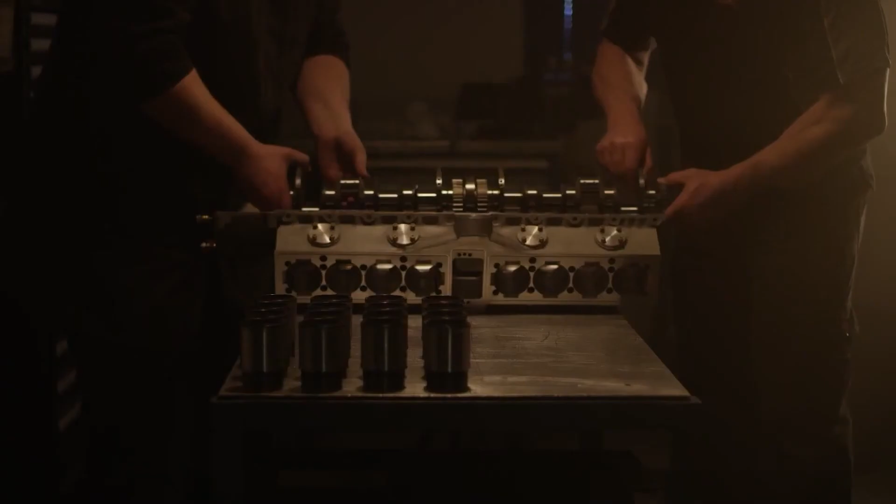Did you know there's an engine out there with no crankshaft? Or another so big it can host a wedding party? Welcome to the bizarre world of automotive engineering, where nothing is too strange if it works. Today we're counting down the 10 weirdest car engines you've never heard of, from V16 oddities to piston-free madness. Buckle up, because this ride gets mechanical in all the wrong ways.

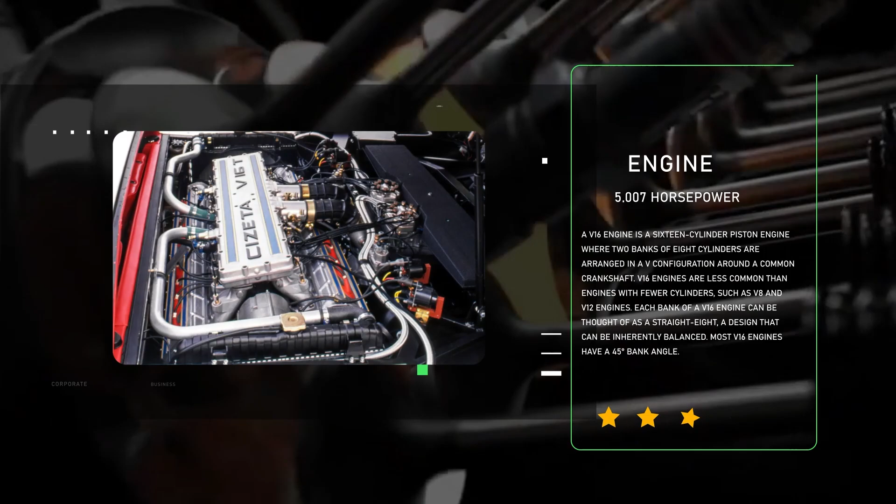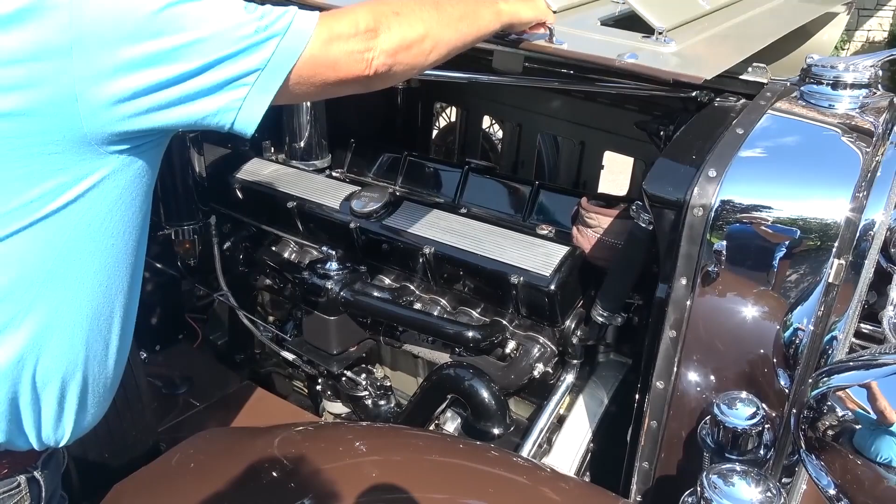Let's start off the list with an unusual build that nobody saw coming. Number 10, V16 Engine. The V16 engine is one of the weirdest ever made, not because it's impractical, but because it exists at all. 16 cylinders? Really? That's more moving parts than anyone asked for, and yet a few bold manufacturers decided to push the limits of engine design just to say, why not?

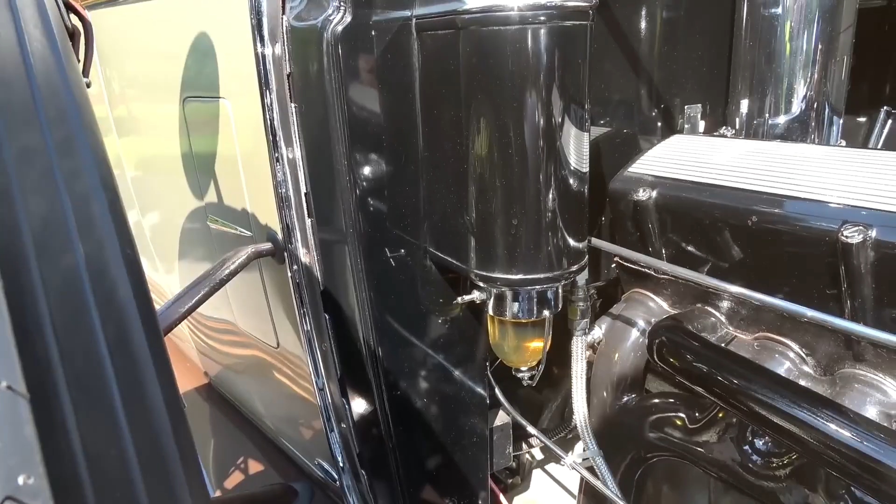While V8s became the gold standard for power and smoothness, a V16 takes that idea and doubles it, literally. You're looking at two V8s sharing a crankshaft, sometimes even operating in two separate banks with independent intake and exhaust systems. It's like someone saw a V12 and thought they could do more.

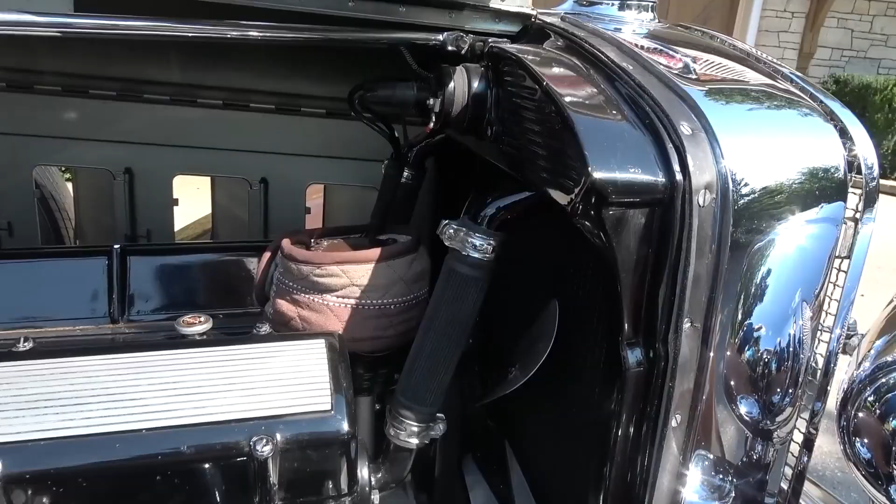Now, the weirdness really kicks in when you realize how few of these actually made it to public roads. Cadillac famously used V16s in the 1930s as rolling proof of engineering excess. Auto Union, which later became part of Audi, experimented with them for race cars. More recently, brands like Cizeta shoved a V16 into a transverse layout just to melt gearheads' brains.

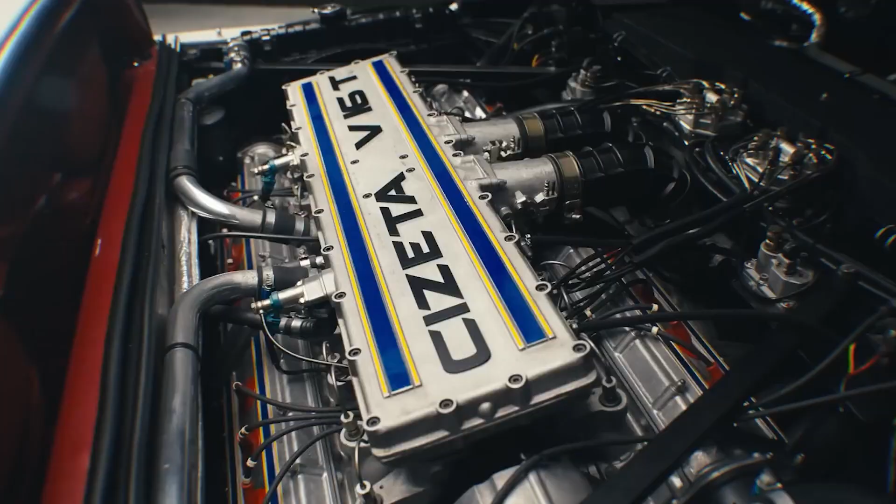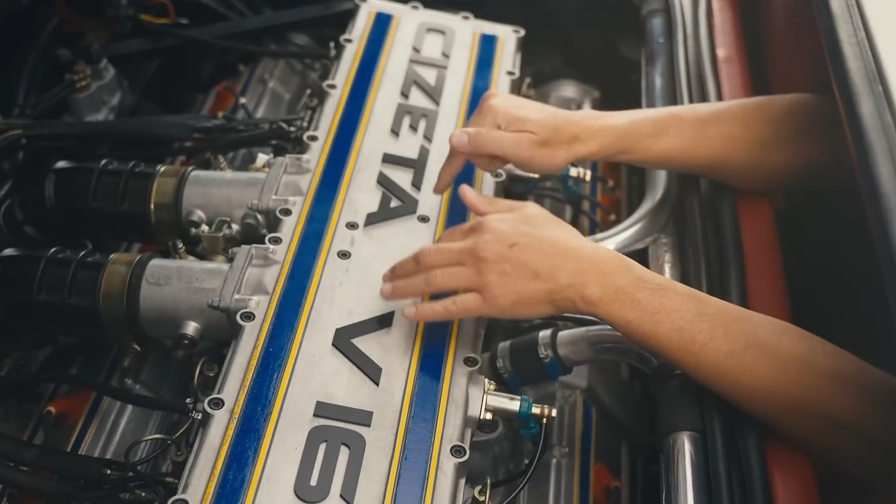The packaging issues alone are nightmare fuel. These engines are massive, complicated, and hard to cool, making them more of a flex than a functional solution. But perhaps the weirdest part is that they're too smooth. With so many cylinders firing in such close succession, a V16 barely makes a rumble. It hums. For some enthusiasts, that's oddly unsatisfying. You expect drama and get silence.

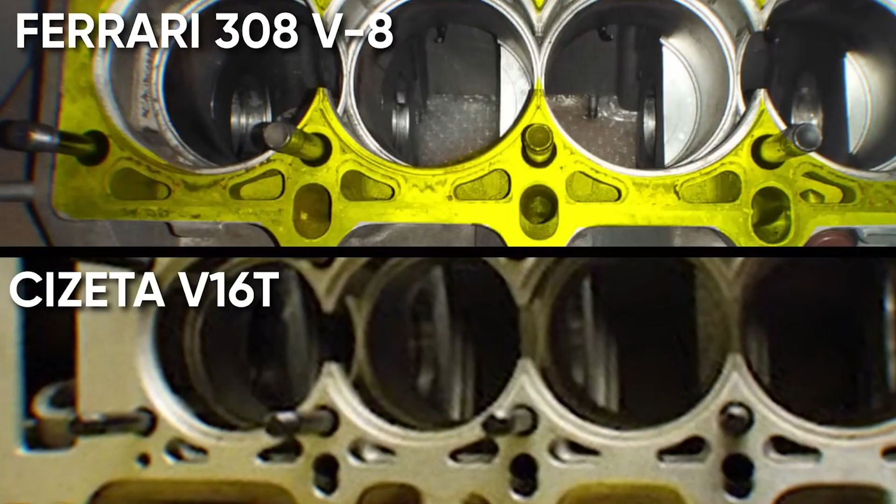So, while it's mechanically sound and mind-bogglingly balanced, the V16 ends up in the Weird Engine Hall of Fame not just because of its over-the-top layout, but because it answers a question almost nobody asked. It's a monument to excess, a curiosity of engineering bravado, and a glorious example of when more becomes bizarre just by existing.

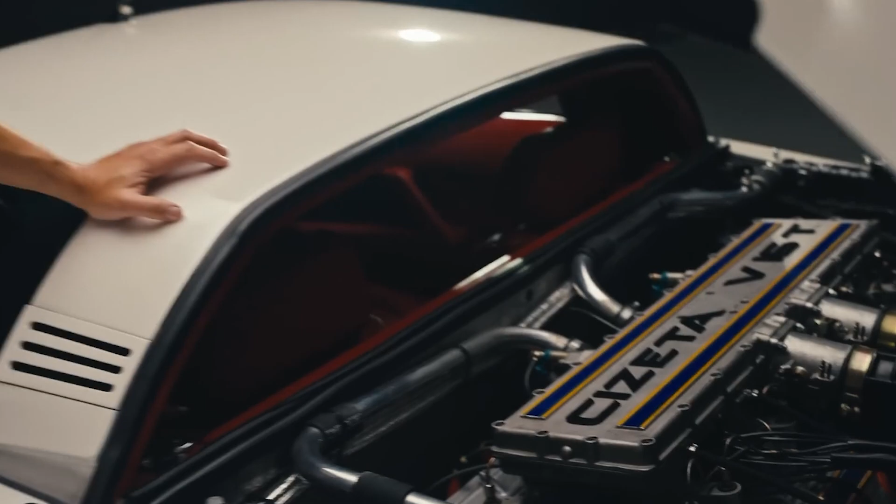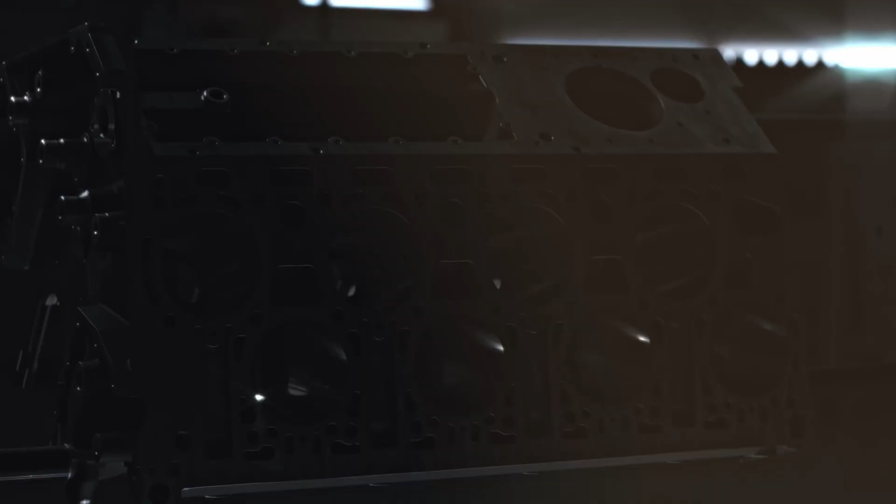Next on the list is this engineering oddity. Number 9, Bugatti W16. The Bugatti W16 is the mechanical absurdity that somehow made it into real-life hypercars. Think about it, a quad-turbocharged, 8-liter, 16-cylinder monster made by merging two narrow-angle V8s into a W configuration. That alone makes it one of the most over-engineered, overachieving power plants in automotive history. Who else but Bugatti would greenlight something this extreme just to make a point?

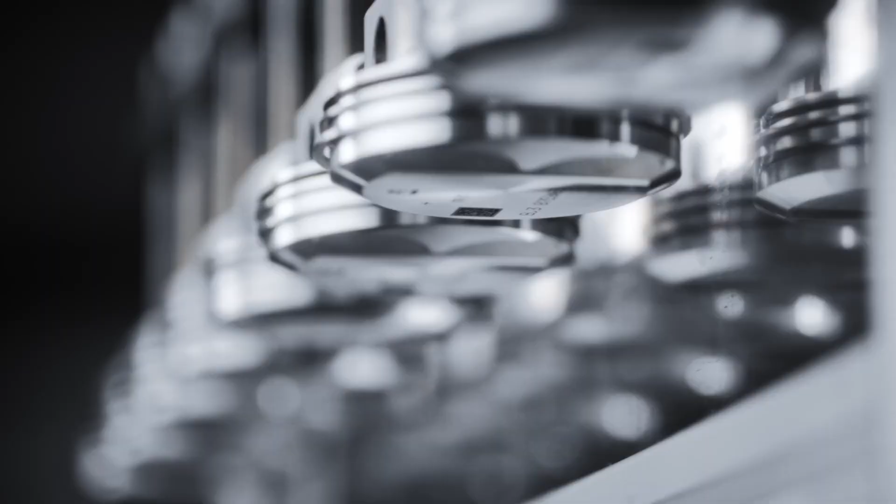Let's break down the weirdness. Most modern engines aim for efficiency, compact packaging, and manageable complexity. The W16 threw all that out the window. It has 64 valves, 4 turbochargers, 10 radiators, and demands an intricate cooling system just to stay civil at idle. The thing drinks fuel like a jet engine and sounds like one when pushed. Yet somehow this unholy amalgamation of parts puts out 1,000 to 1,600 horsepower, depending on the version.

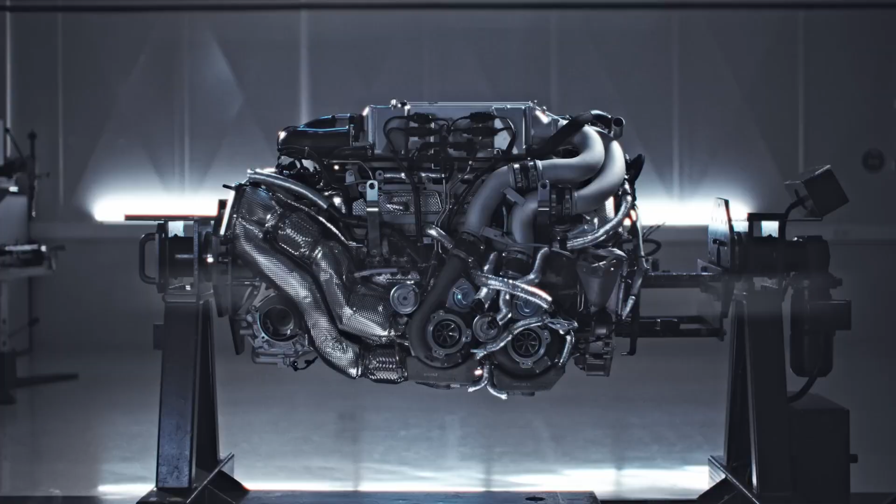This engine isn't a brute like you might expect. In fact, you can drive it in traffic. You can even make it your daily commute if you want your neighbors to know how edgy you are, and it won't overheat or stall. That's part of the weird genius. Bugatti didn't build a race engine. They built a luxury-capable monster that behaves better than some commuter cars.

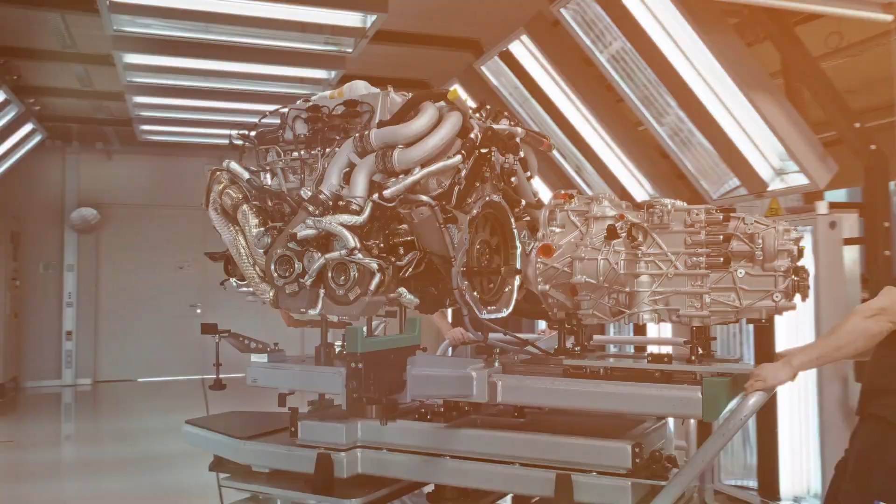Also, it's incredibly rare. Outside of the Veyron and Chiron, no other production car uses this setup. Why? Because no other car maker wants to mess with the sheer complexity or the astronomical cost of building something like this. It's not weird because it failed, it's weird because it succeeded. An engineering middle finger to normalcy, and we may never see anything quite like it again.

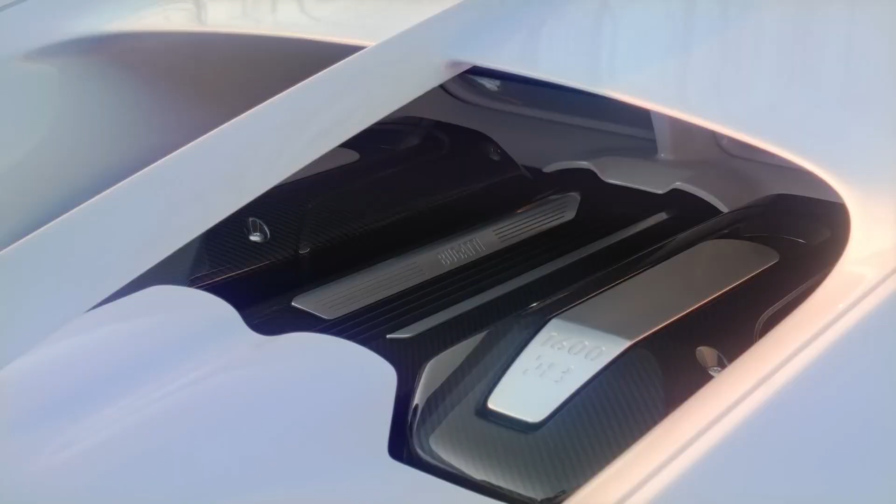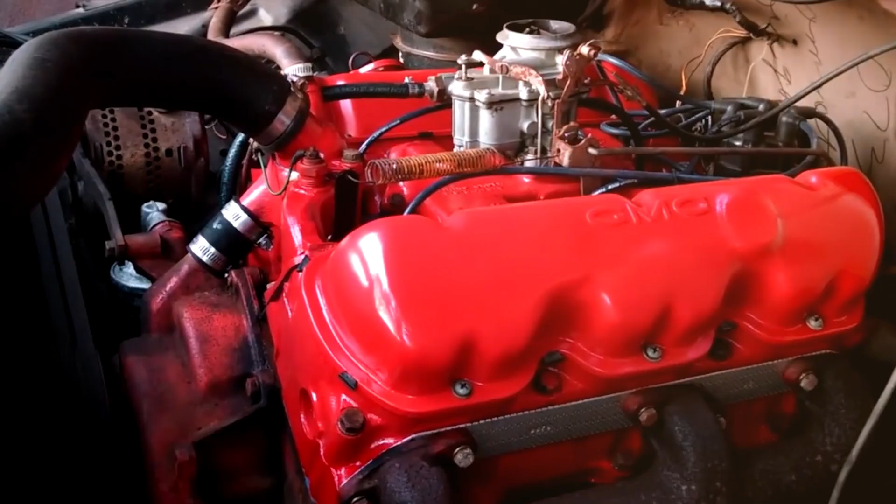Number 8, GMC Twin 6 V12. The GMC Twin 6 V12 is a bizarre mechanical mashup that somehow made it to production. Born in the 1960s, this 702 cubic inch, 11.5-liter behemoth wasn't made for speed demons or luxury cruisers. It was designed for workhorses like heavy-duty trucks.

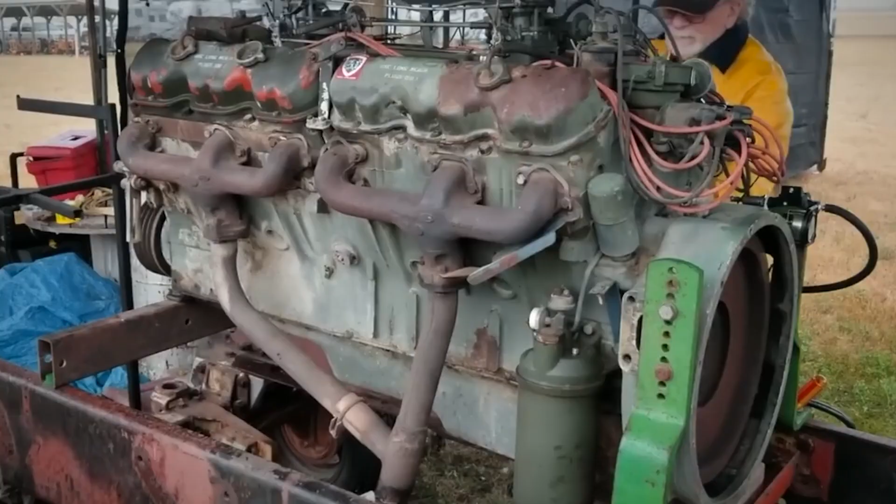Interestingly, GMC didn't build this V12 from scratch. Instead, they basically welded together two 351 cubic inch V6s. Yes, two V6s on a single block with a shared crankshaft. The result was a Frankenstein's monster of an engine that looked like it had no business running, but somehow did.

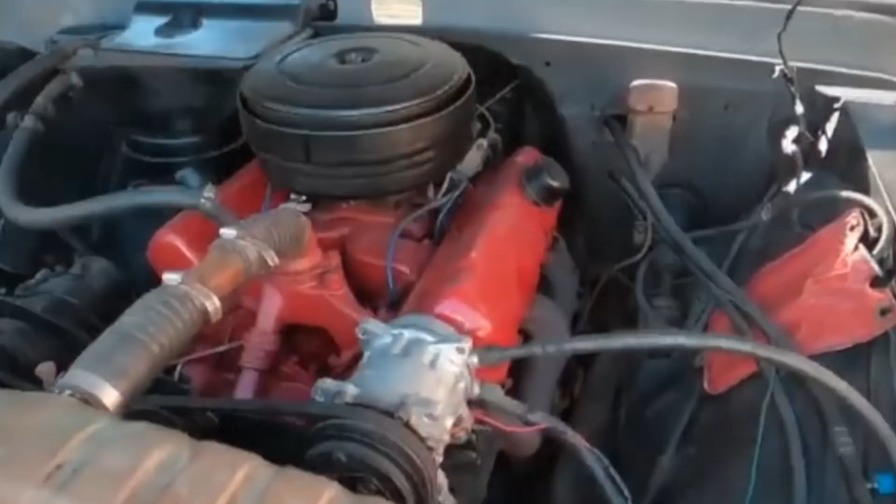It had a single distributor, but 2 intake manifolds, 2 exhaust manifolds, and 12 spark plugs. The engine produced a modest 275 horsepower, but a mountain-moving 630 pound-feet of torque. Perfect for hauling freight or dragging buildings off foundations.

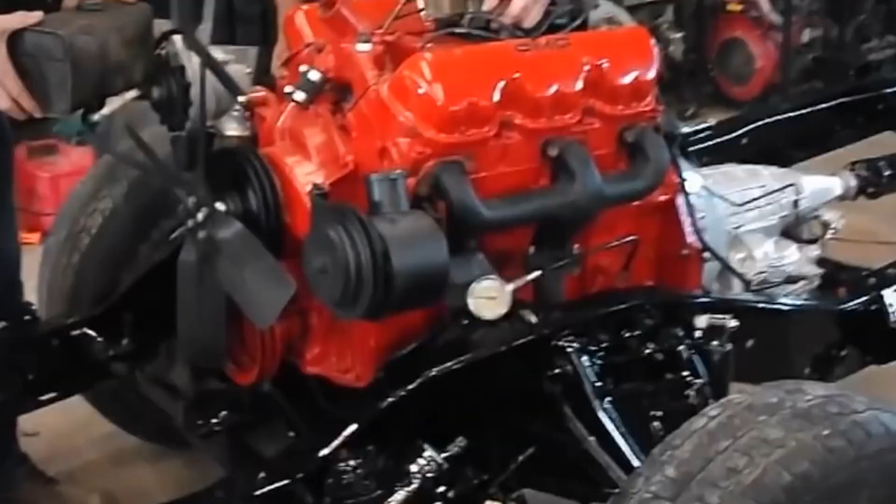What made it extra strange is how smooth it was for its size, as vibrations were almost non-existent, thanks to the symmetry of the design. But despite its clever layout and surprising refinement, it was massive, heavy, and drank fuel like a retired battleship.

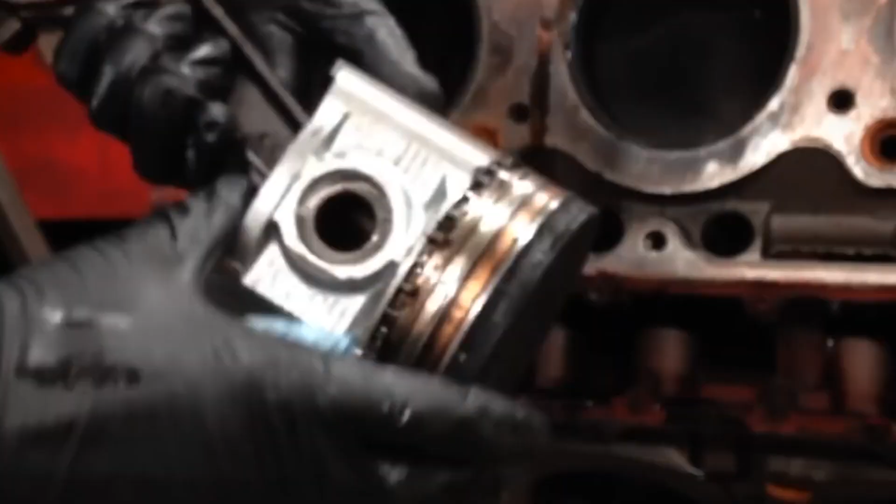Still, it ran cool, lasted forever, and made maintenance easy because many parts were shared with the V6s it was born from. Today, the Twin 6 is a forgotten oddity. It never made its way into pickups or performance builds, and you won't see one at your local drag strip. But its sheer size, hybridized design, and utilitarian purpose make it one of the weirdest engines ever bolted into a vehicle. It was practical insanity, a V12 born from necessity, not excess, and that, in the world of strange engines, earns its spot in the Hall of Fame.

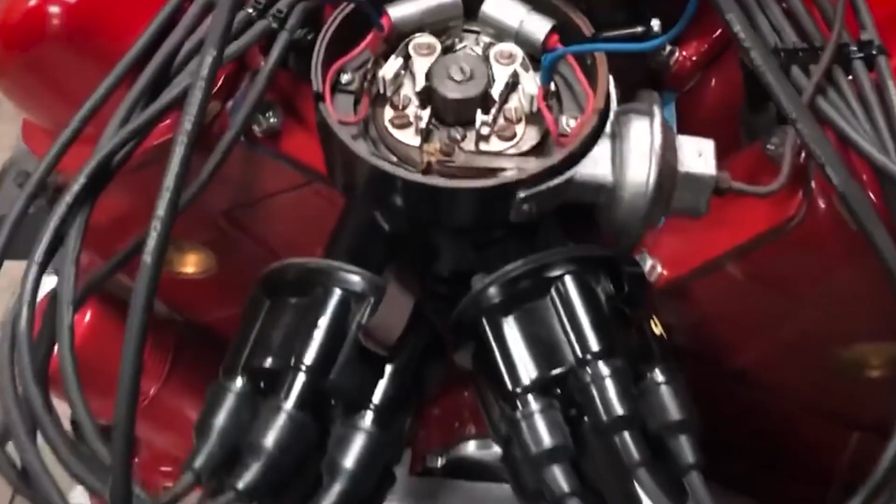Number 7, Oldsmobile Turbo Rocket V8. The Oldsmobile Turbo Rocket V8 earns its place among the weirdest engines ever made because it was a turbocharged V8 in the early 1960s. That alone should raise eyebrows.

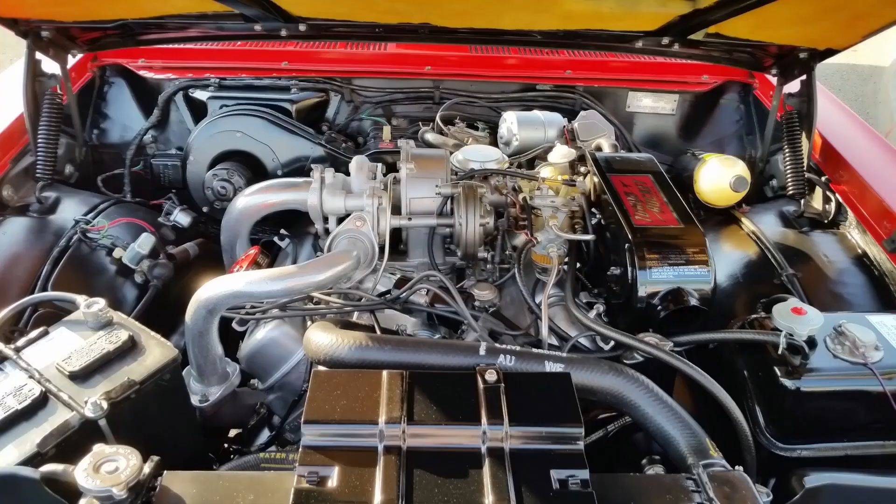Back in 1962, when most people still thought a turbo was some kind of airplane gadget, Oldsmobile dropped this oddity into the compact Jetfire Coupe. It was a 215 cubic inch, 3.5-liter aluminum V8 paired with a Garrett T5 turbocharger, making it one of the first production turbocharged engines in the world.

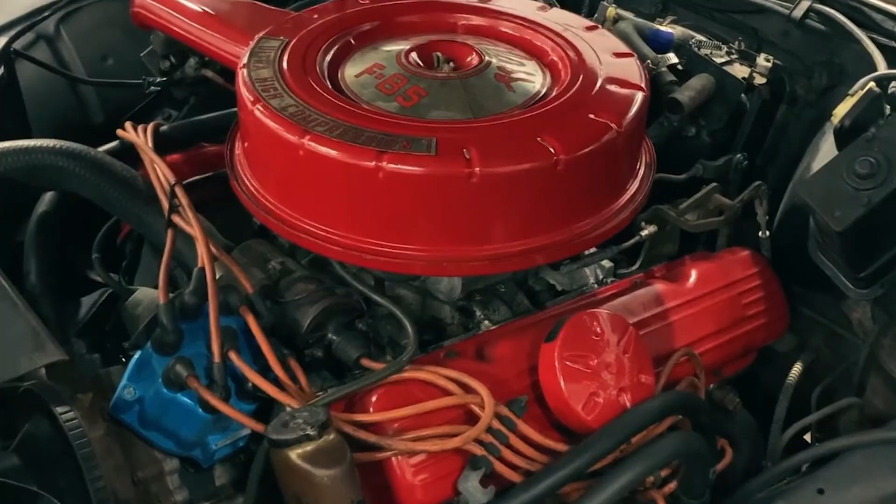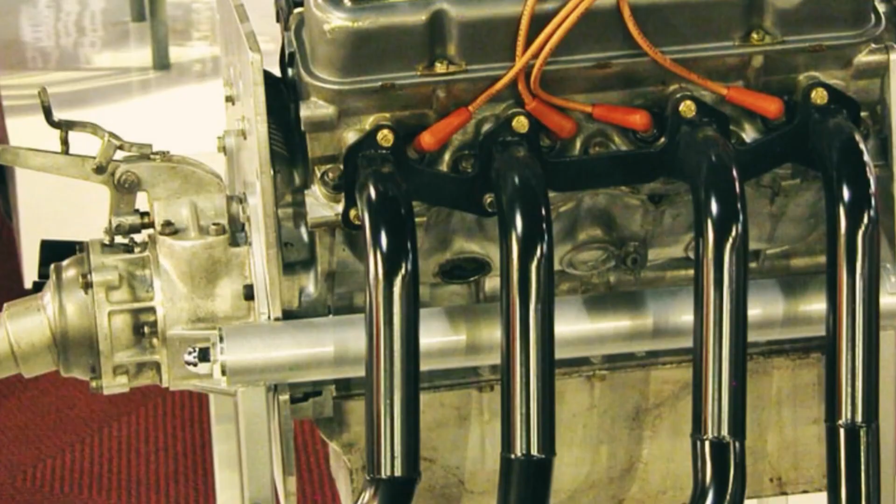But here's where things got truly bizarre. To keep the engine from detonating itself into scrap metal, Oldsmobile introduced a special fluid called turbo rocket fluid, a mix of water and methanol you had to refill manually. If the tank ran dry, performance dropped like a rock and the engine could knock or even break. It was like having to water your turbocharger to keep it happy. That's not engineering, that's a science experiment on wheels.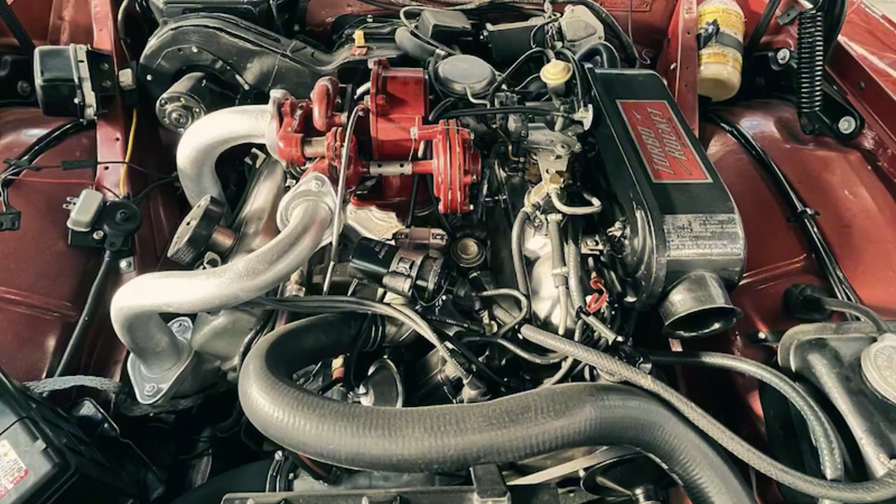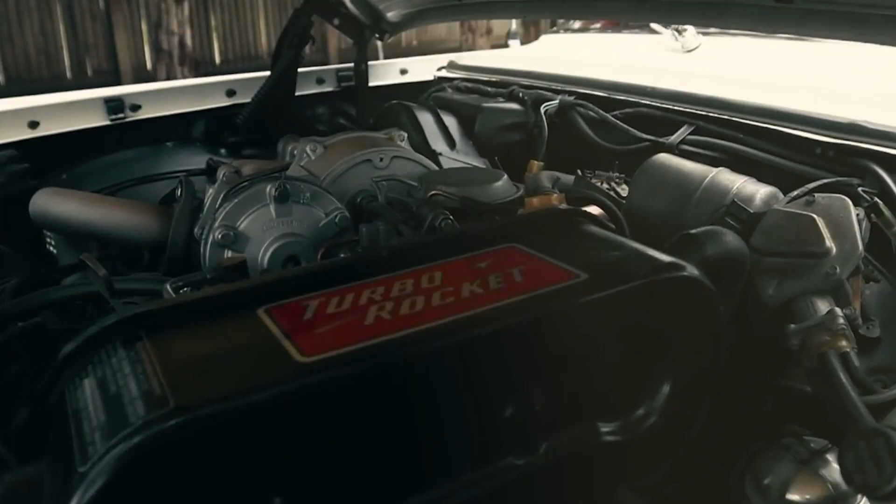Drivers didn't understand the tech, dealerships didn't know how to service it, and mechanics, most of them just yanked out the turbo altogether because it caused more confusion than horsepower. It made about 215 horsepower, which was impressive for its time, but the system's fragility and complexity doomed it. The Turbo Rocket V8 was way ahead of its time, but it was also way too complicated for an era

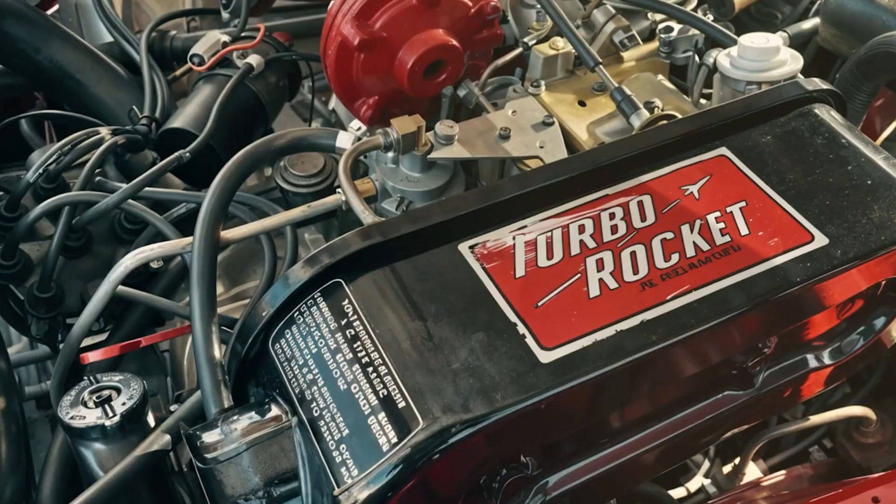where most people didn't even know what a fuel injection system was. It tried to introduce 21st century thinking in the middle of a muscle car decade, and the result was a magnificent, misunderstood mechanical weirdo that never stood a chance. That's why it's not just rare or historic, it's straight up bizarre, and still sparks conversation to this day.

Number 6, Cizeta V16T. The Cizeta V16T is one of the weirdest engines ever made because, frankly, no one asked for it, and yet someone still built it with absolute conviction. Designed in the late 80s by Claudio Zampolli, a former Lamborghini engineer, the V16T was powered by a 6-liter transverse-mounted V16 engine. Yes, you read that right, a 16-cylinder engine mounted sideways in a supercar.

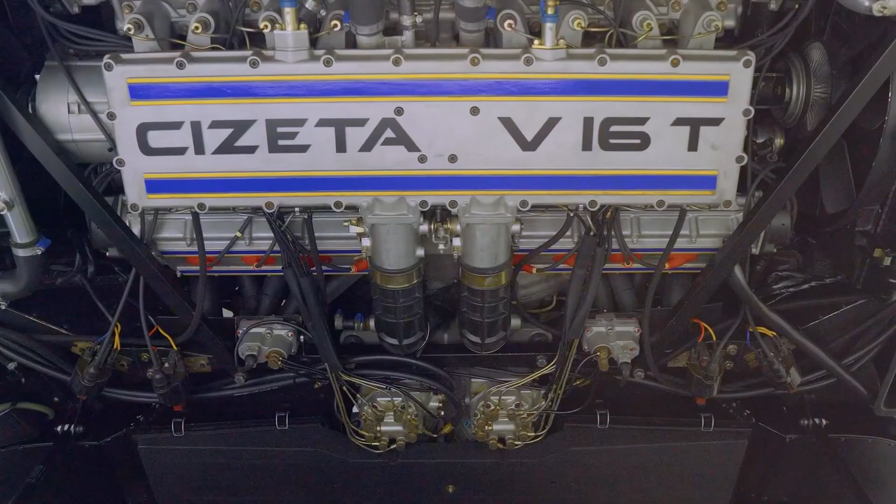In a world where V12s were already a handful and most supercars stuck to simpler V8s or V10s, this was like bringing a bazooka to a boxing match. What makes it even weirder is how they created it. The V16 was essentially 2 Lamborghini V8s fused together into a single block, with a central shaft routing power to a rear transaxle. That meant the engine was not only absurdly wide, but also required extensive engineering just to make the packaging work. This led to the car's massive, almost cartoonishly broad rear end.

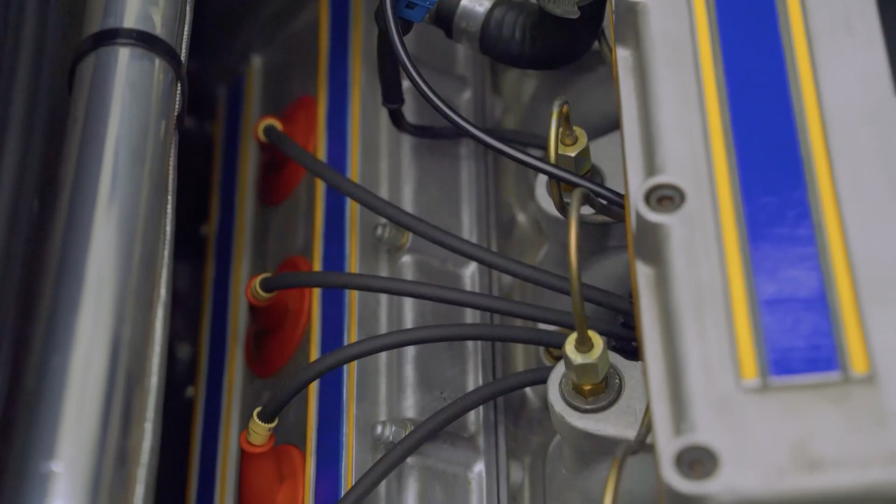From a technical perspective, it was an ambitious attempt at excess. The engine produced 540 horsepower, which was impressive at the time, but the car's bizarre proportions, extreme layout, and limited production, with only a handful made, turned it into an engineering curiosity more than a performance legend.

Then there's the design. The V16T looks like a Countach and a Testarossa got into a fight in a mirror maze. Loud, angular, and impossibly dramatic. It screamed 1980s futurism with zero restraint. In the end, the Cizeta V16 didn't sell well, wasn't particularly practical, and never reached the heights of its more famous rivals. But in terms of pure mechanical audacity and why-not energy, it's in a league of its own. A transverse V16? That's not just weird, that's next-level automotive madness.

Now that we're into the top 5, prepare for things to really get weird.

Number 5, Free Piston Engine.

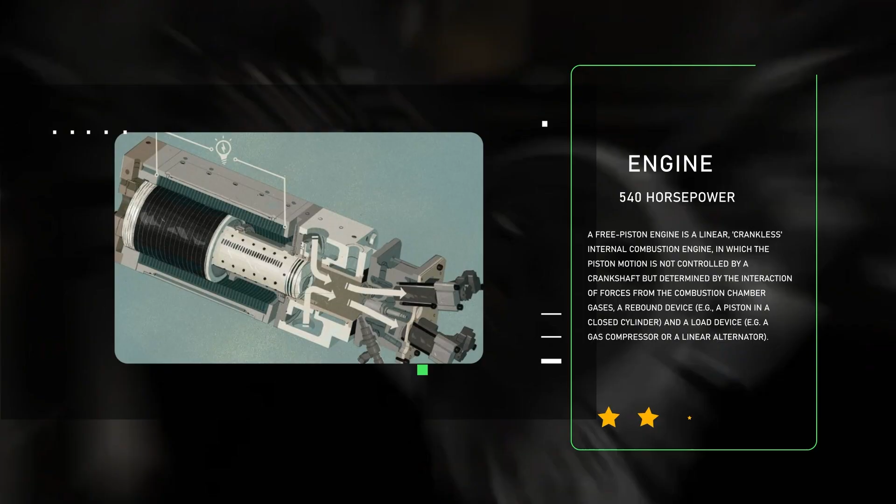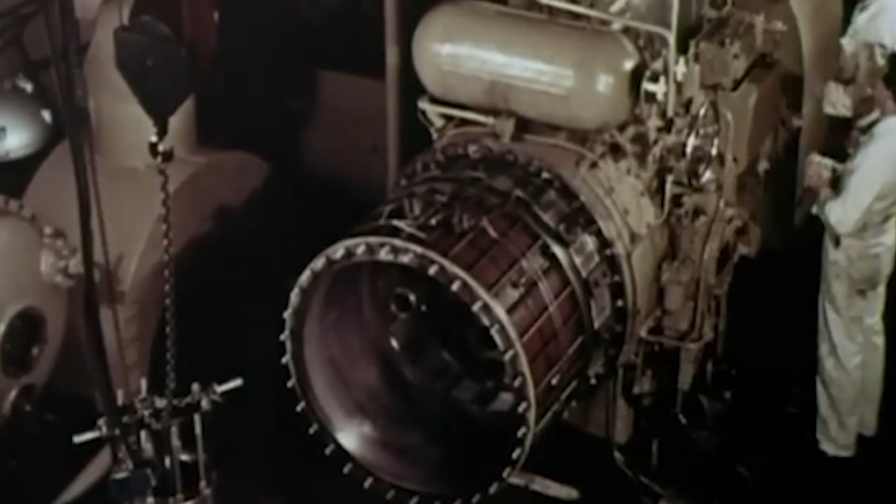The Free Piston Engine is downright alien in how it throws out almost everything you thought an engine needed to function. No crankshaft, no connecting rods, no traditional pistons spinning something to make wheels go round. Instead, this thing operates with pistons that move freely in a straight line, bouncing back and forth between combustion chambers like high-speed pogo sticks trapped in a tunnel.

Here's the real kicker. Instead of turning mechanical motion into rotational force like a normal engine, the free piston engine often powers a linear generator, turning that back and forth motion directly into electricity. That's right, it skips the entire crankshaft party and goes straight into generating juice. In some versions, it was even considered for hybrid vehicles, acting as a range extender without any direct connection to the wheels.

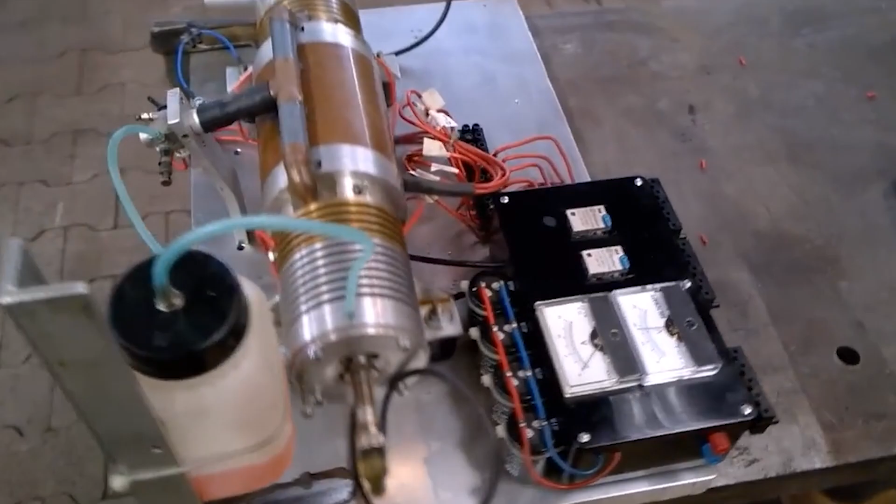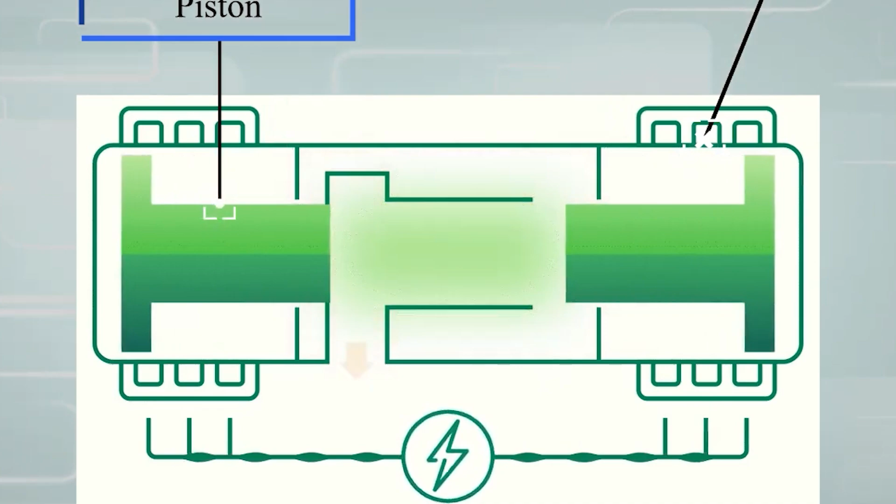And because the pistons are free-floating, everything has to be balanced and timed perfectly by the forces of combustion and compression alone. There are no cams or gears holding anything together, just a controlled internal explosion trying not to send everything flying in opposite directions. If you're picturing controlled chaos wrapped in metal, you're close.

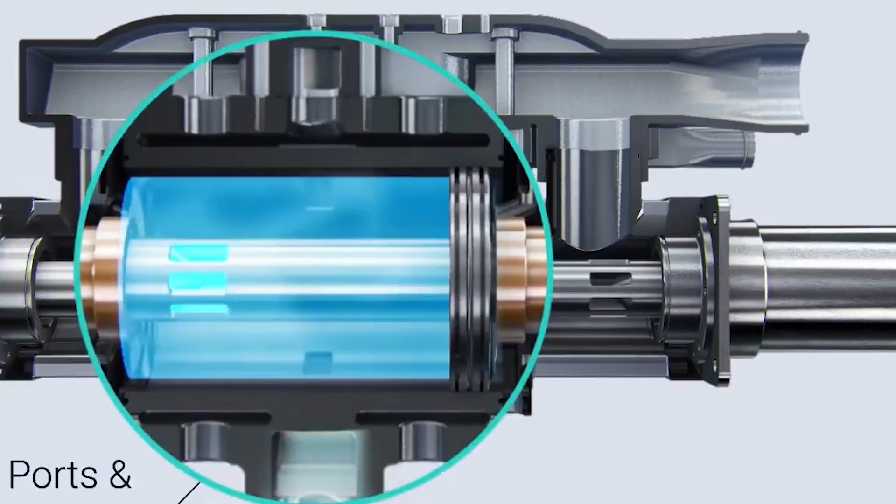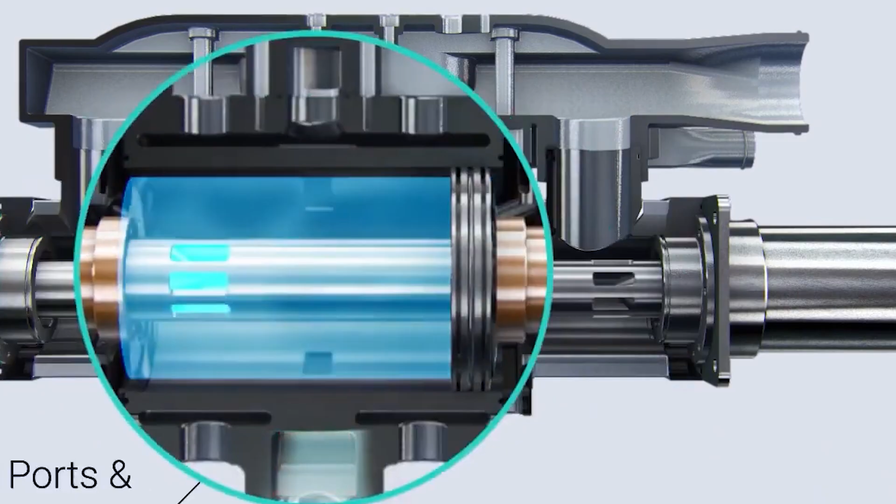While it's never been mainstream, the free piston concept has seen interest from experimental automotive tech, military applications, and even renewable energy setups. It's one of those ideas that keeps popping up every few decades like a mad scientist's dream that refuses to die. Why is it one of the weirdest engines ever made? Because it breaks nearly every rule of internal combustion engines and somehow still works. It's bizarre, brutally efficient in theory, and proof that when engineers throw out the rulebook, you end up with something that looks more like science fiction than anything you'd expect under a hood.

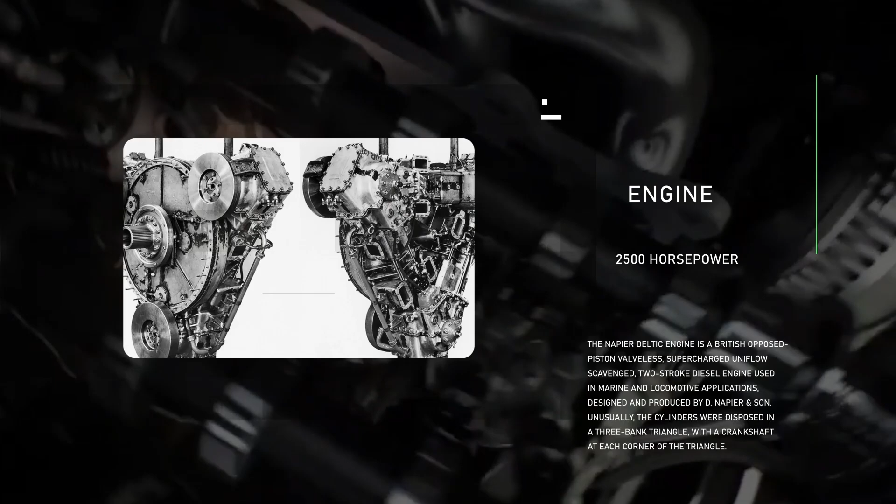Number 4, Napier Deltic. At number 4 is the Napier Deltic engine, and it's not just weird, it's the kind of mechanical madness that looks like someone tried to build an engine using submarine blueprints and a bucket of caffeine. Born in post-war Britain, the Deltic wasn't made for your typical car or even aircraft. Nope, this monster was designed for naval vessels and locomotives where noise, complexity, and sheer engineering insanity were apparently welcome.

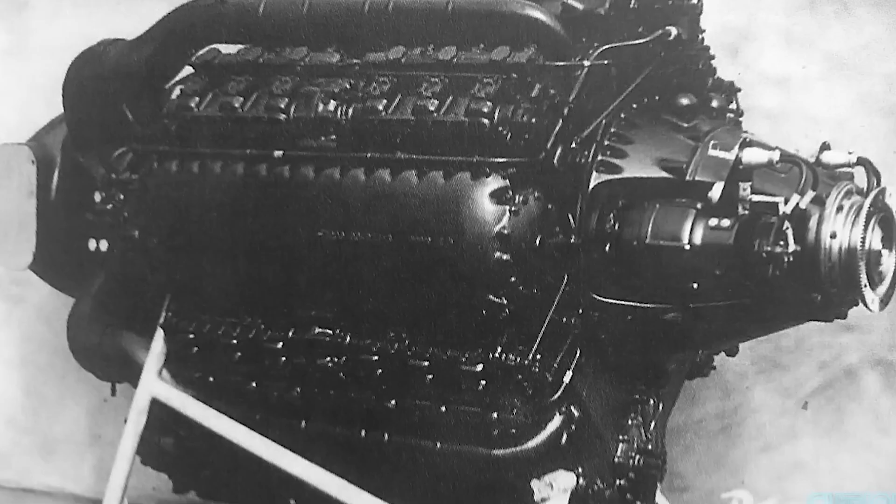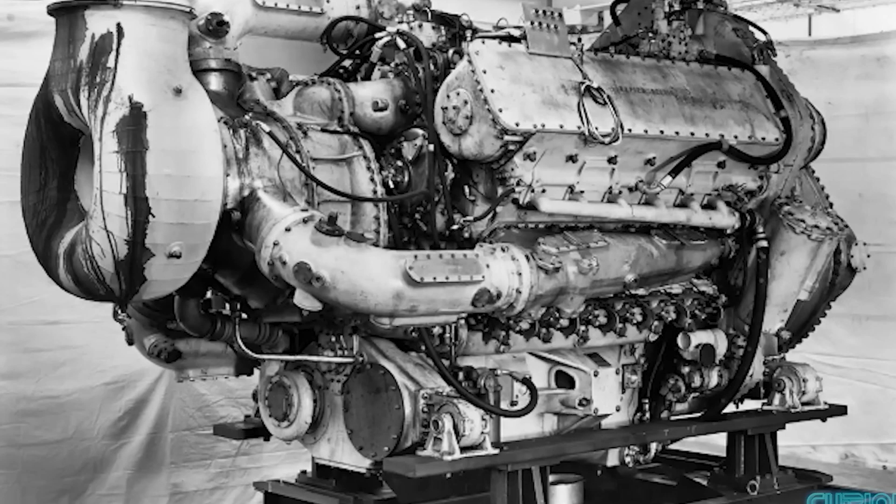So, what makes it so bizarre? Start with the shape. Instead of your usual inline or V-shaped configuration, the Deltic is literally shaped like a triangle. Inside that triangle are 3 banks of opposed pistons. Each side of the triangle is essentially its own cylinder bank, and each bank drives its own crankshaft. That's right, this thing has 3 crankshafts, synchronized through an intricate gearing system that looks like clockwork exploded.

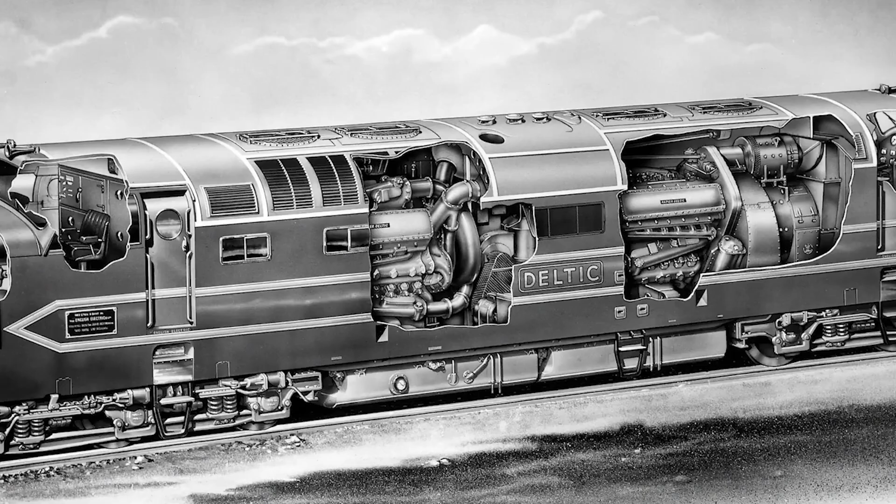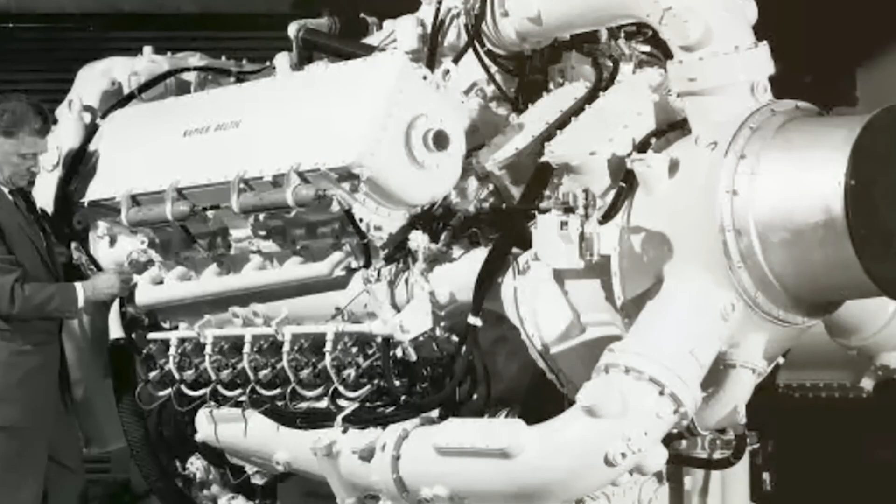It's a 2-stroke diesel engine with no cylinder heads because each pair of pistons meets in the middle of the combustion chamber, meaning they compress the fuel-air mixture between them. The whole setup was supposed to offer massive power in a compact space, which it did. The Deltic could rev absurdly high for a diesel and push out more than 2,500 horsepower in some variants, which is absolutely wild considering it was first developed in the 1950s.

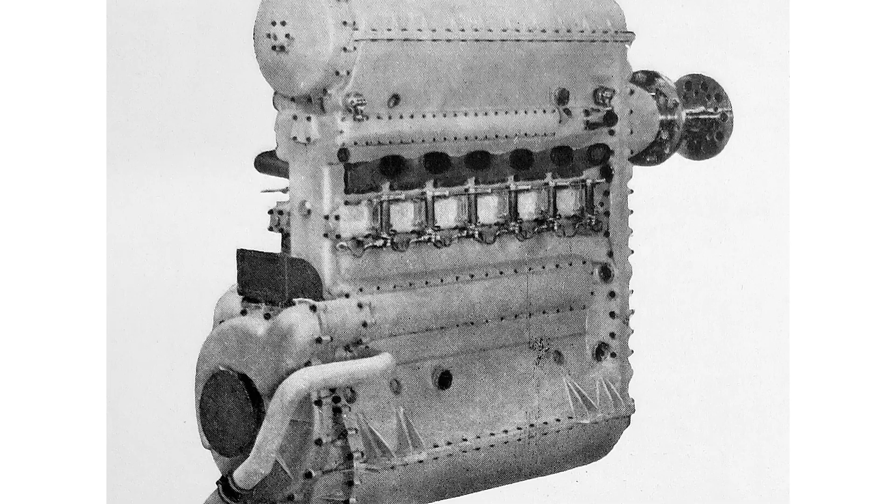But with all that clever engineering came equally intense headaches. Maintenance was brutal, synchronizing the crankshafts was a nightmare, and the noise? Think chainsaw meets freight train on fire. Still, it found success in British naval patrol boats and diesel locomotives where space was tight and power was king. Today, the Deltic is a mechanical legend, an engine so strange and over-engineered it's hard to believe it ever existed, but it did, and it ran loudly.

Number 3, BRM H16. The BRM H16 engine is the kind of engineering madness that makes even seasoned gearheads raise an eyebrow. Built in the mid-1960s for Formula One, this 3-liter monster was a mechanical jigsaw puzzle on wheels.

Instead of a conventional V layout, BRM decided to stack 2 flat 8 engines on top of each other and connect them via complex gearing. The result? A 16-cylinder H-shaped layout that was as ambitious as it was heavy, unreliable, and utterly perplexing.

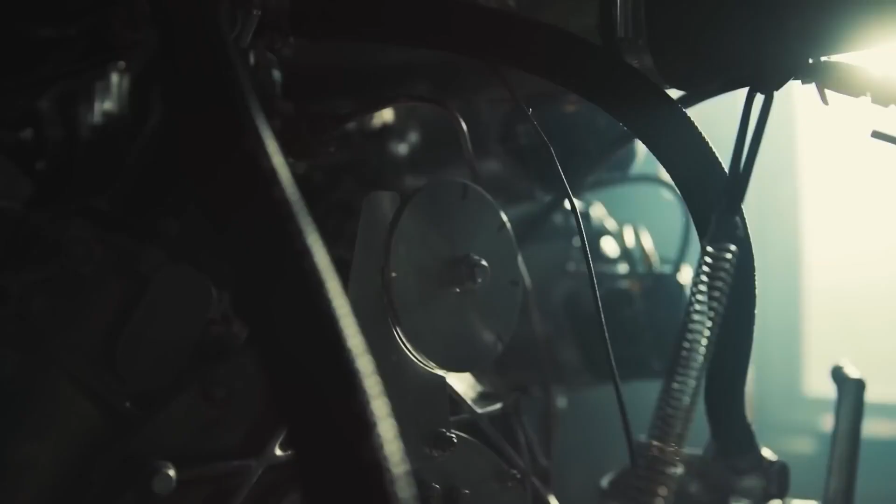On paper, it sounded revolutionary. 2 horizontally opposed engines working in sync should have delivered power and balance, right? Well, not quite. We're talking about 4 camshafts, 32 valves, dual crankshafts, and enough moving parts to make even the bravest mechanics sweat. The engine tipped the scales at nearly 500 pounds, way too heavy for a Formula One car, especially one meant to be agile and nimble.

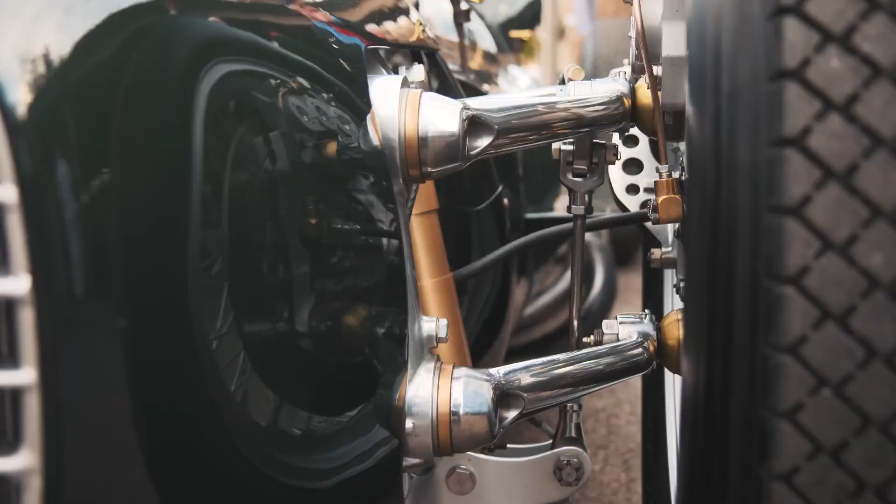Despite its flaws, the H16 did have one shining moment, powering the Lotus 43 to a single Grand Prix victory in 1966. But even that win came with a catch.

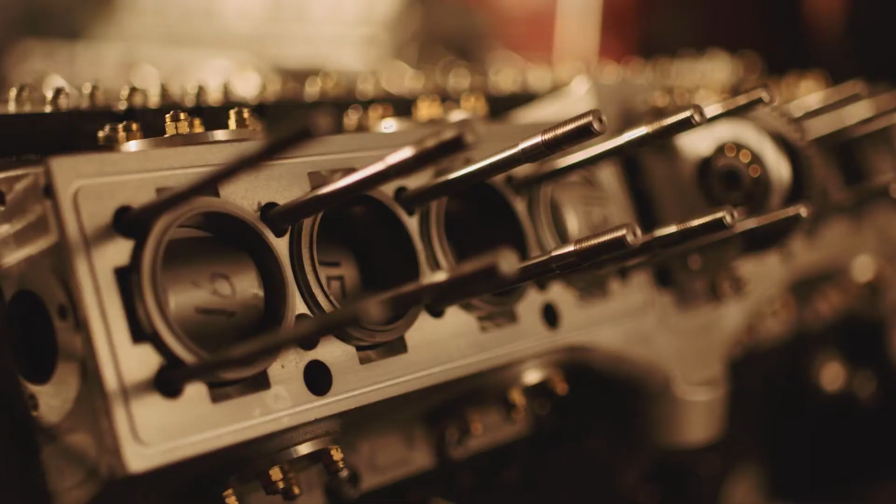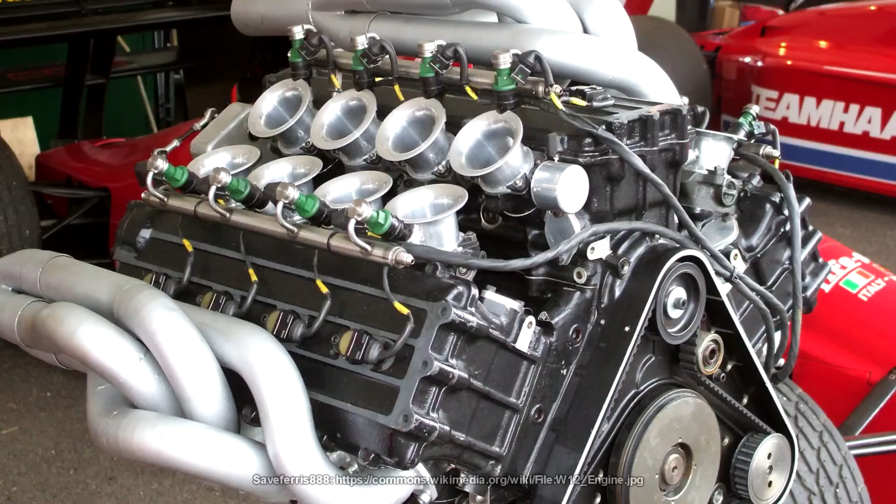The engine was reportedly on its last legs by the time the checkered flag waved. The BRM H16 remains infamous, not just because it was weird, but because it was a bold leap into the unknown. It took a simple goal, make more power, and twisted it into an overcomplicated, unreliable, yet strangely fascinating attempt at innovation. It's not a success story. It's a cautionary tale of what happens when engineering creativity goes completely off the rails. And that's exactly why it belongs on any list of the weirdest engines ever made, because no one before or since has dared to make an engine like it again.

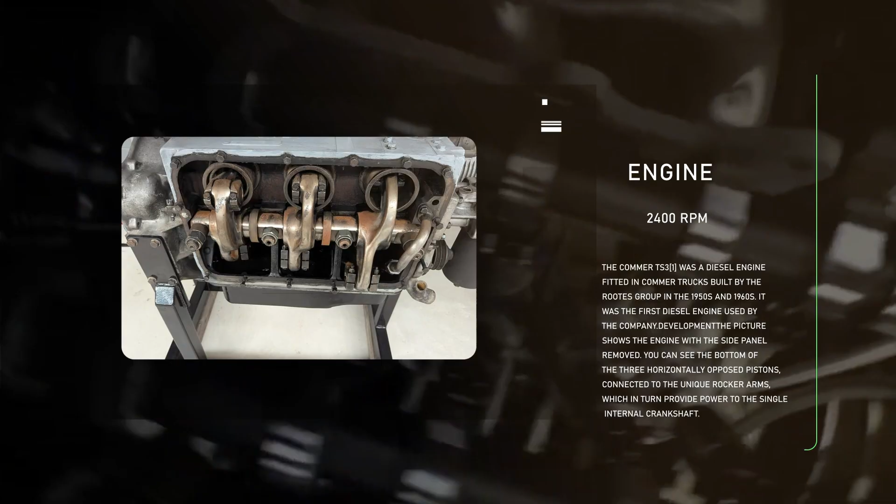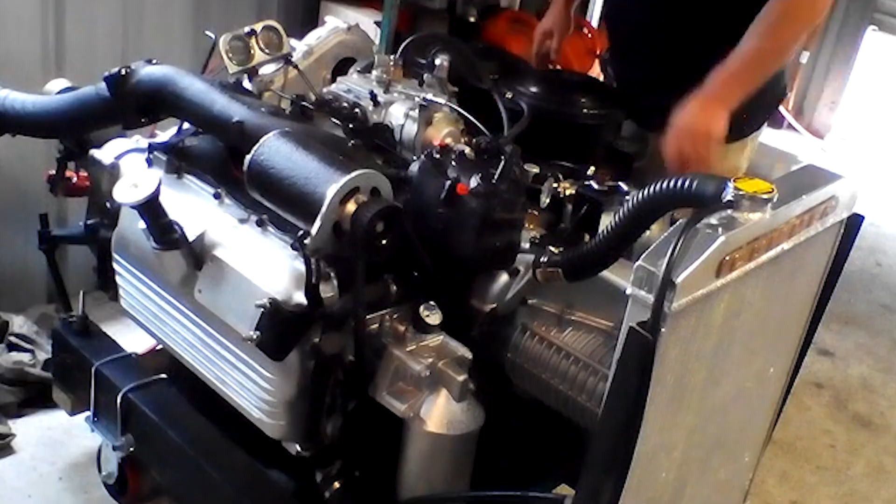Number 2, Rootes TS3. The Rootes TS3, affectionately and sometimes mockingly known as the Knocker, is well worth its place at number 2 for one simple reason. It broke almost every conventional rule in engine design and somehow still worked. This British-built 3.3-liter 3-cylinder 2-stroke diesel engine wasn't just quirky, it was a full-blown mechanical oddity.

Let's start with the basics. The TS3 had opposed pistons, meaning each cylinder contained 2 pistons facing each other. There were no cylinder heads. Instead, combustion happened between the pistons as they approached one another, compressing the air-fuel mixture from both ends. That's already bizarre, but it gets wilder.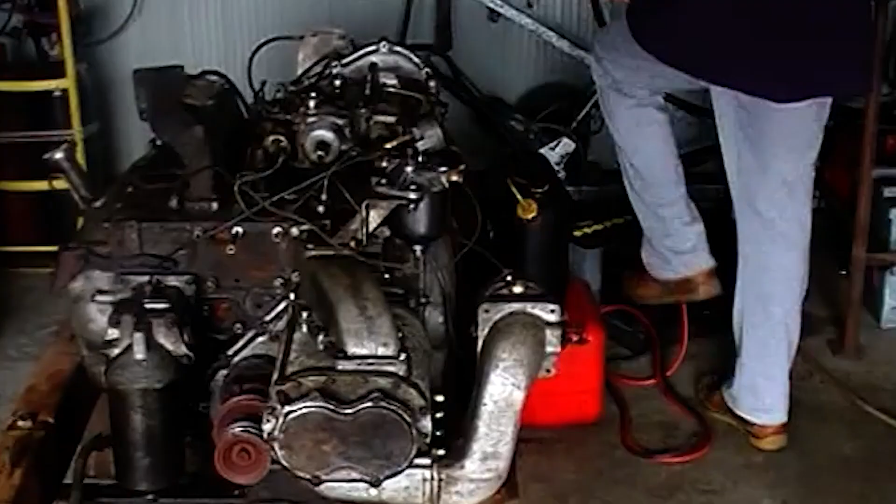These pistons weren't driving 2 crankshafts, like in many other opposed piston designs. No, the TS3 had only 1 crankshaft, and it drove all 6 pistons through an elaborate system of giant, clattering rocker arms and connecting rods. Think of it like 2 seesaws fighting each other inside an engine block, and you're getting close.

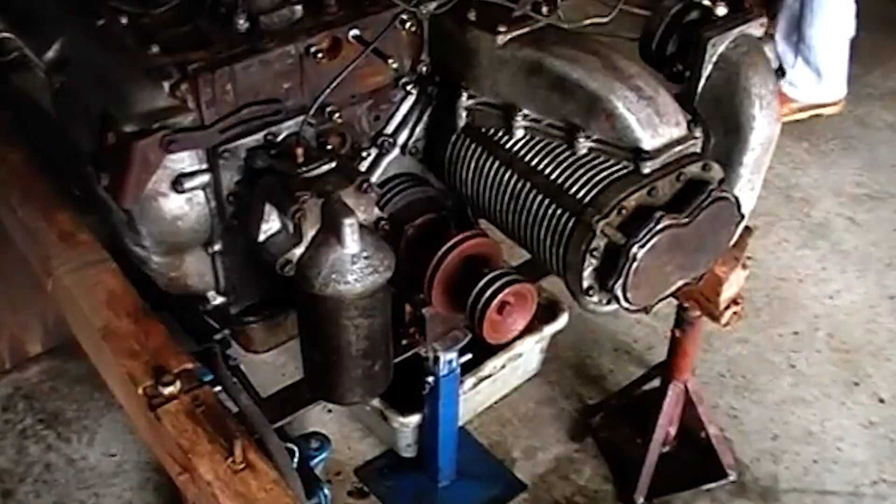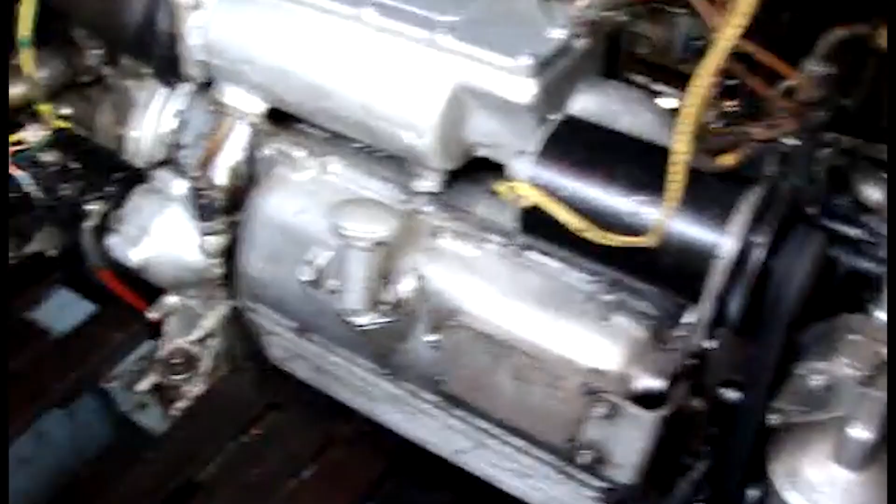And oh boy, did it make a noise. The engine's unique layout gave it a distinct knocking sound that made it instantly recognizable on British roads, hence the nickname Knocker. Truck drivers either loved it or hated it, but there was no in-between. It was loud, crude, vibrated like a washing machine on max spin, but it was also reliable, torquey, and compact enough to fit under the cab floor in forward control trucks.

In terms of weirdness, it checks every box: unconventional layout, strange sound, Rube Goldberg-style mechanics, and a performance curve that was unlike anything else on the market. It may not have been beautiful, but it was undeniably brilliant in its strangeness. The TS3 is one of those engines that makes you ask why, and then slowly nod and say, actually, why not? And now for the number one, the weirdest car engine ever made.

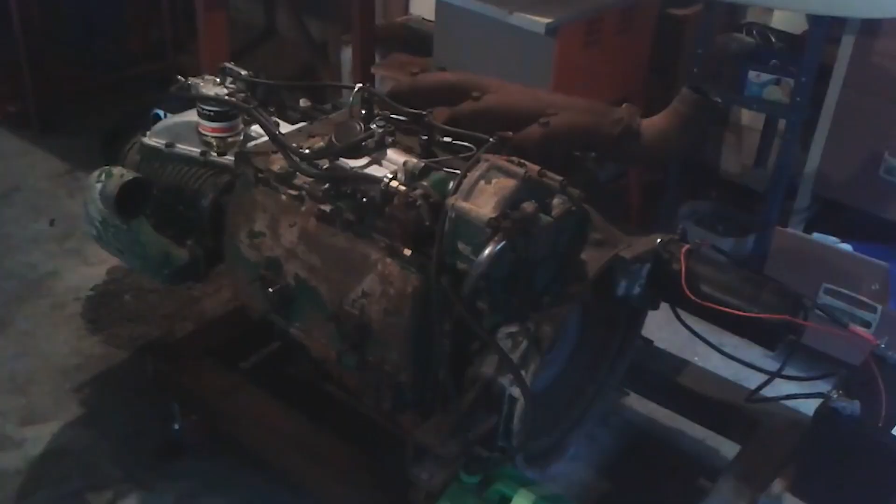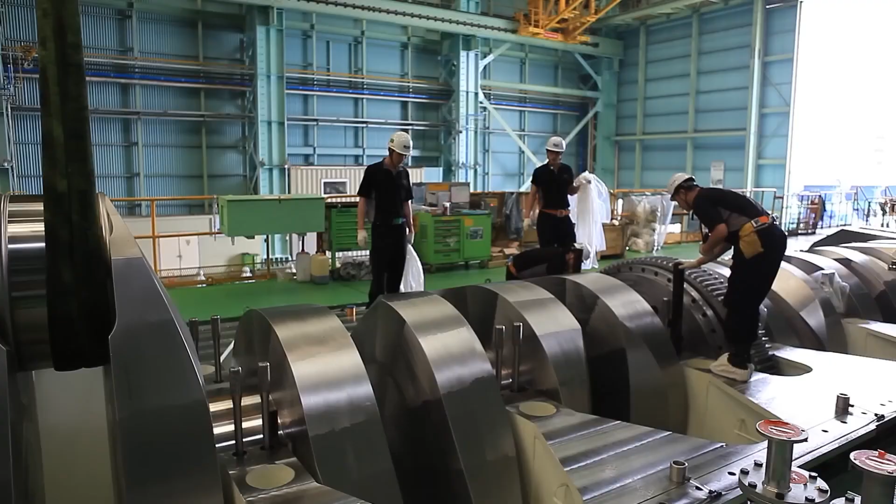Number 1, Wärtsilä RTA96-C. The Wärtsilä RTA96-C isn't just an engine, it's a skyscraper that burns fuel and moves ships. This beast holds the title of the largest and most powerful internal combustion engine in the world, and the scale alone makes it one of the weirdest mechanical creations humanity has ever cobbled together.

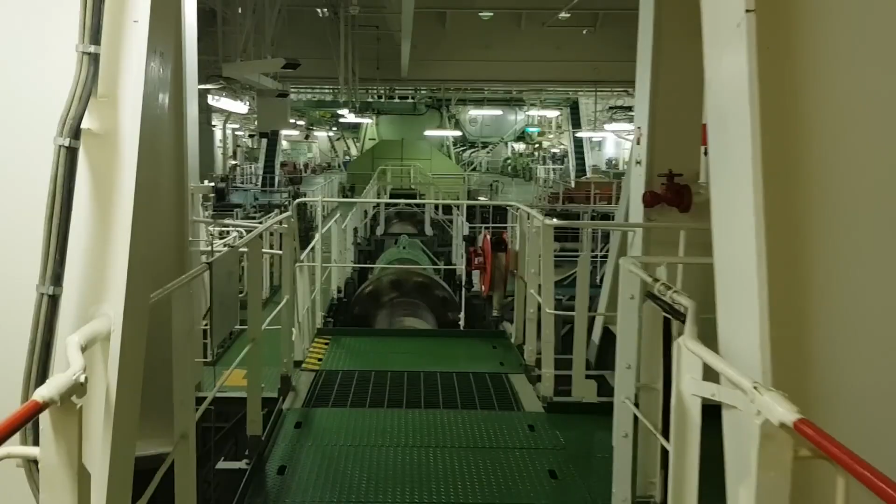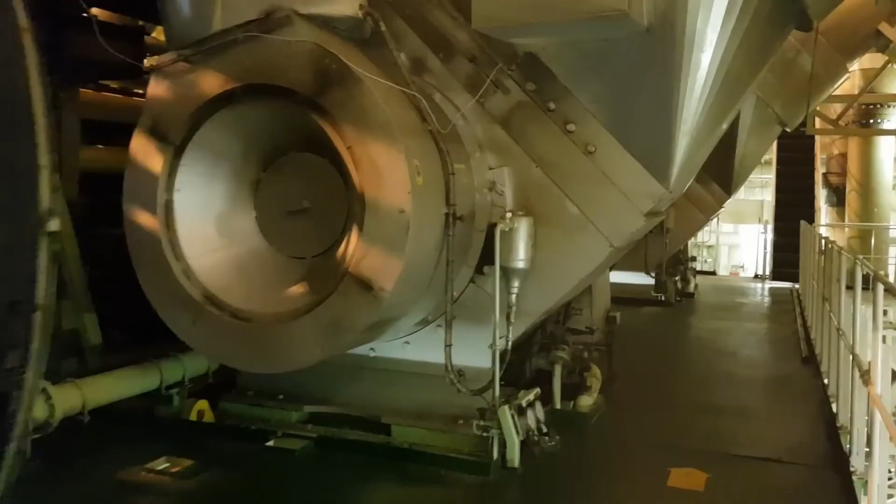Measuring over 89 feet long and 44 feet high, it's not something you drop into a car or even a tank. It's designed solely for container ships that ferry thousands of tons of cargo across oceans, and its specs are flat out bonkers. This turbocharged two-stroke diesel engine can have up to 14 cylinders, and each of those cylinders is the size of a small room. Each piston alone weighs several tons, and when the engine's running, it operates at just 102 RPM, barely idling by automotive standards. But that idle cranks out over 107,000 horsepower and nearly 7.6 million newton meters of torque.

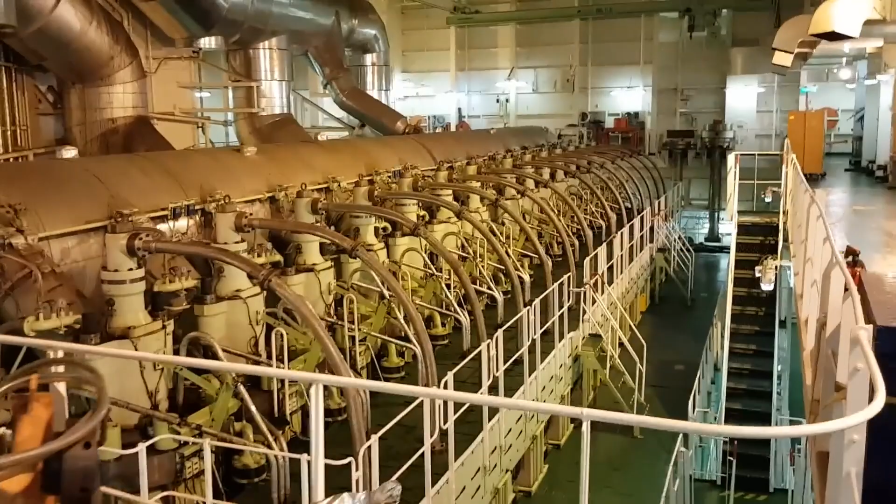To put that in perspective, that's enough grunt to pull multiple trains up a mountain sideways. And unlike anything you've ever seen in a regular vehicle, this engine uses crosshead pistons, massive connecting rods, and a labyrinth of turbochargers and intercoolers. All so big they require ladders and catwalks just to inspect. Maintenance? Entire teams of engineers work inside the engine.

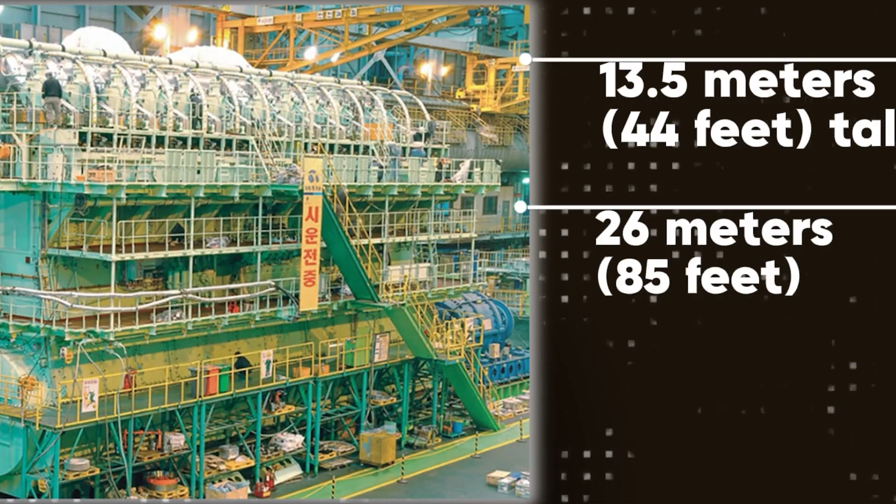It's also incredibly efficient for its size, designed to burn low-grade bunker fuel while achieving surprisingly good thermal efficiency thanks to electronic injection and precision timing. But at the end of the day, what makes the RTA 96C so weird isn't just its scale or power, it's that it turns a ship the size of a floating city into something smooth and reliable. Without a doubt, the RTA 96C is industrial absurdity at its finest.

Which of these engines shocked you the most? Let us know in the comments.